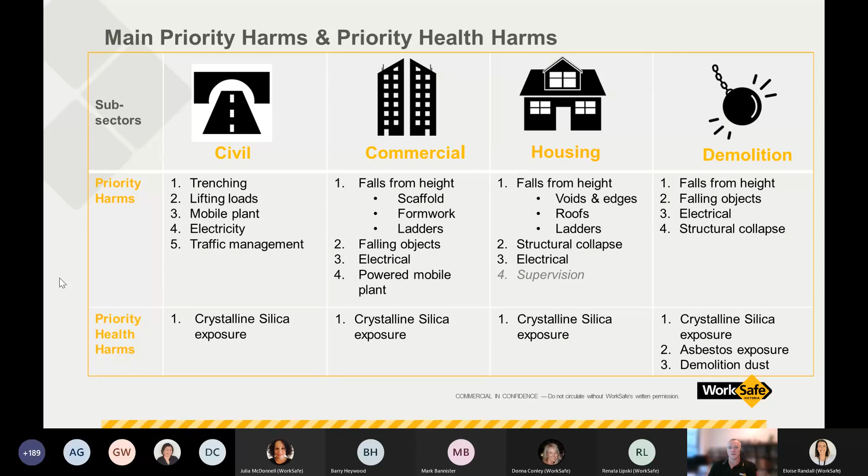I do a lot of work through the TAFE space, through presentations through industry with people that work in this industry as well, licensing groups, plumbers. And one of the key things we find is that a lot of people have that mindset that we don't have to control the risk of an engulfment until we get over 1.5 metres deep. But the fact is, whenever there is the possibility of engulfment, regardless of the depth of the trench, that risk needs to be controlled. And if that means benching, battering, putting trench shields in place, then that's what we need to do.

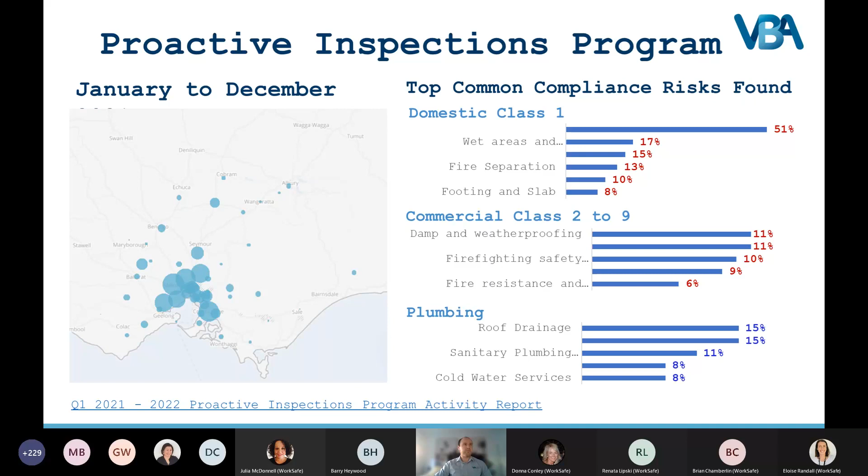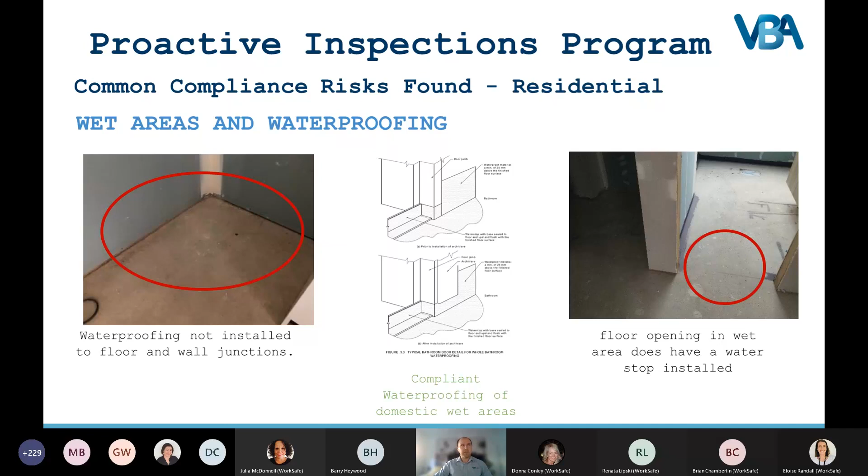Here we have compliance risks found in fire separation. We find fire separating walls not constructed as per the manufacturer's requirements and the tested system: shaft liner panels damaged, lack of mineral wool installed at external intersections, gaps not maintained between the frame and the shaft liner, wall clips that are nailed and not screwed, and wall clips only installed to one side of the shaft liner.

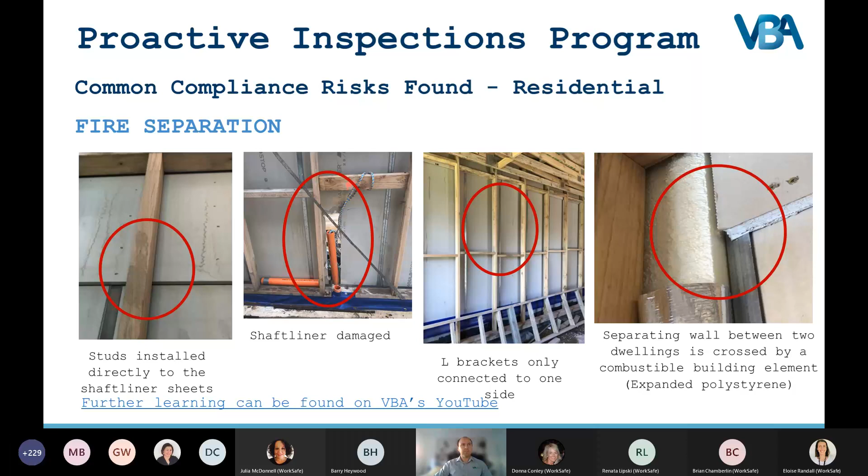We also find risks relating to timber framing. The common ones are penetrations through top plates greater than 25 mil, shear blocks missing to non-load bearing brace walls, and bottom plates overhanging the slab greater than 10 mil.

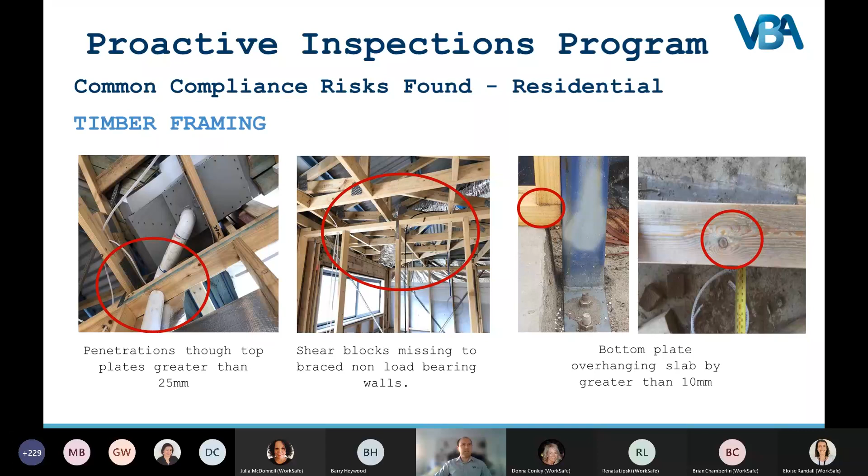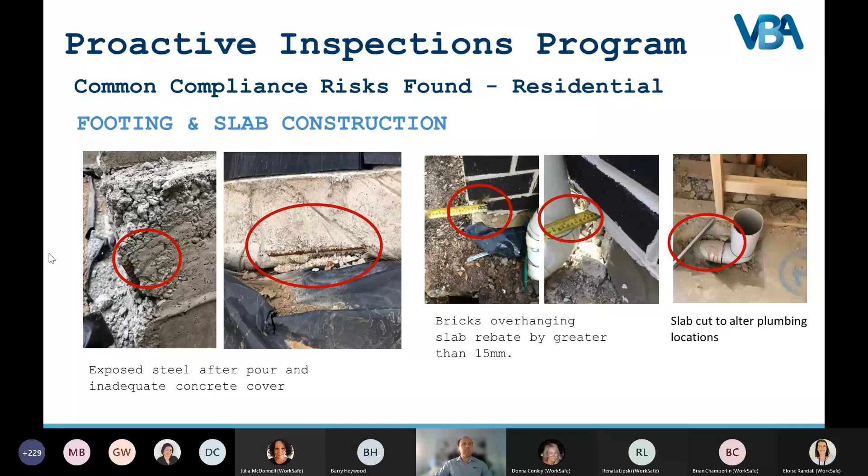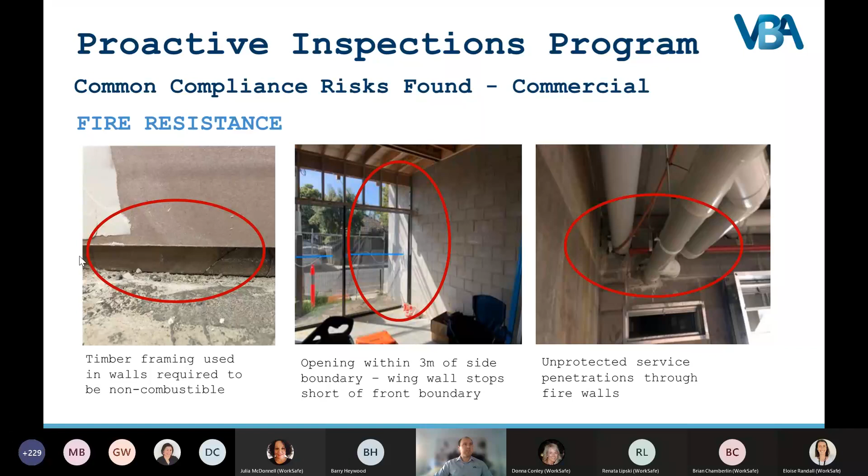Please, Donna. Yeah, with regards to access for people with a disability, some of the more common risks we find relate to non-compliant circulation space at doorways, and your minimum 30% luminance contrast between toilet seat and pan as per 1428.

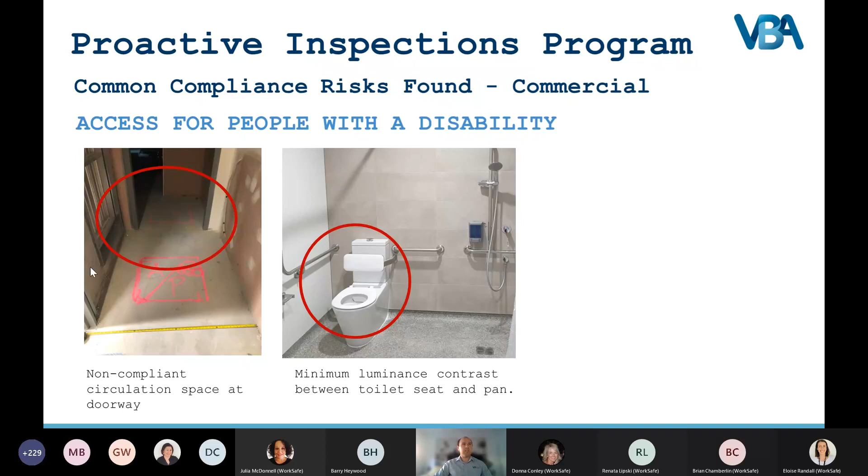Finishing off with damp and weatherproofing, some of the risks we find: bathroom floors not graded to the floor waste, no floor waste provided in urinal areas, and balcony finished floor levels being higher than the apartment finished floor level.

So your photo to the left there, floors to bathrooms of SOUs don't have the fall to the floor waste as per F1.11 of the NCC 2019 Volume 1. The next photo shows no floor waste provided to a wall-hung urinal as per Part F1.7 of the NCC 2019 Volume 1.

And your last set of 2 photos there showing the balcony finished floor level constructed higher than the apartment finished floor level, which in this case, the approved plans required the apartment finished floor level to be 100 mil higher than the balcony finished floor level, but on site was 30 mil the other way around.

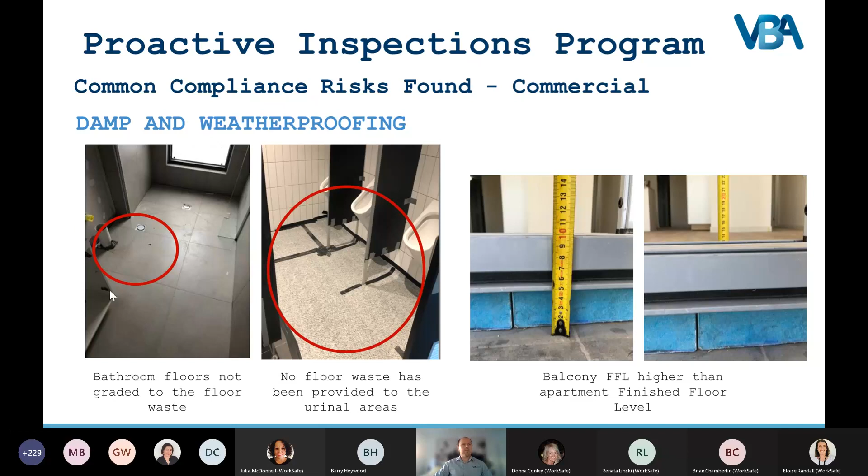I'll be speaking this morning on behalf of Proactive Inspections for Plumbing, and wanted to give you 5 examples of some of the issues our inspectors are finding, and how we think that they could be addressed through industry, particularly with roofing. The top 5 issues being rain head overflow provisions, downpipe spreaders, change of direction in box gutters, box gutter supports, and discharge of valley gutters.

Non-compliance to plumbing standards in all classes of plumbing is an ongoing issue for our trade. And whilst we're seeing significant improvements to achieving compliance and reducing risk for property owners and occupiers, particularly in the sanitary plumbing, unfortunately the same can't be said for roofing. Roofing has been identified as having the highest proportion of non-compliance in comparison to all other classes.

And proactive inspections and plumbing compliance audits through 2020 and 2021 identified design, installation and interpretation of standards for roofing compliance all contribute to the problem. This means that for us, designers, building and plumbing practitioners need to work collaboratively to fix the problem and achieve results that satisfy all parties involved in the construction process.

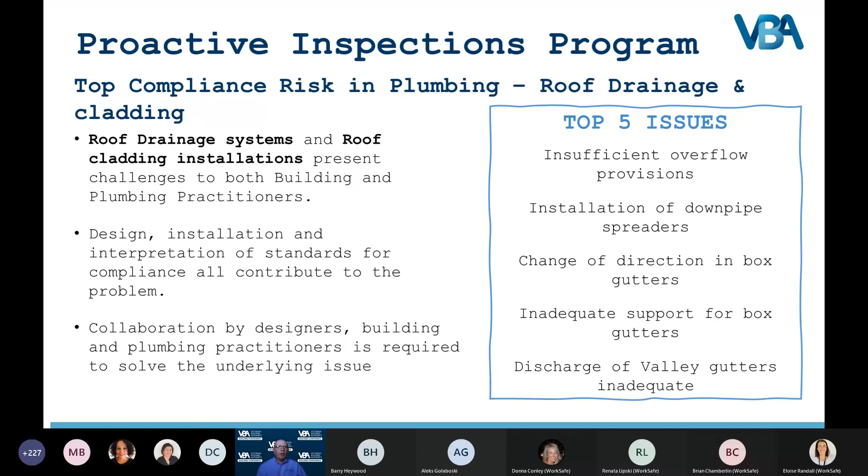So the example here being insufficient overflow provisions to rain heads. Yes, the examples here both have overflow provision provided. It can be asked though, are they appropriately sized to the connected downpipe? The overflow provision being to protect the building from water ingress should the downpipe become blocked.

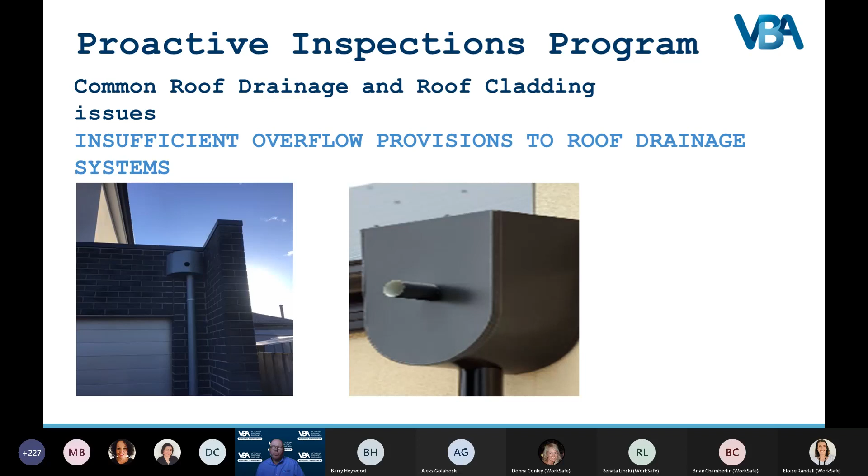Downpipe spreaders not installed in an approved manner. So we have two examples here where on the left we have a downpipe spreader that's discharging into a box gutter. It isn't directly to the sump or rain head, and it can be said that it could be impeding the water flow within that box gutter. The other example is a downpipe spreader which is discharging onto a flashing, again, which could result in water ingress into a building.

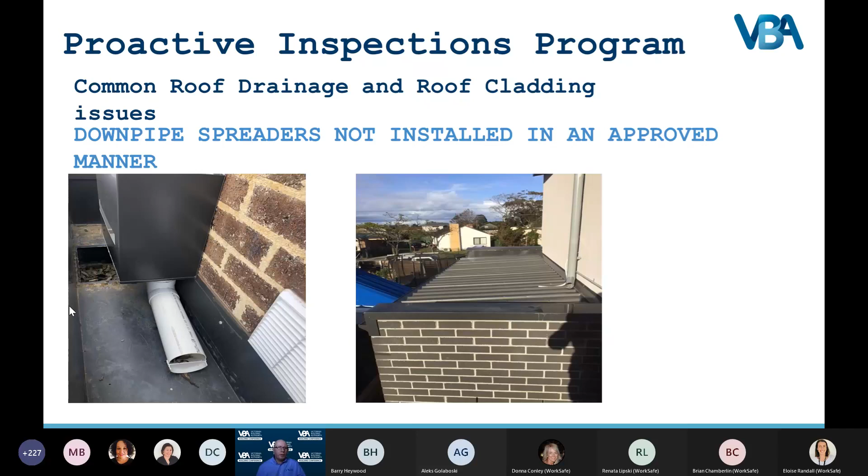Next slide, please. Change of direction in box gutters. In all instances, box gutters need to be straight and without change of direction to discharge. All box gutters must discharge through a sump or rain head and at the downstream discharge point without change of direction, i.e. not to the side.

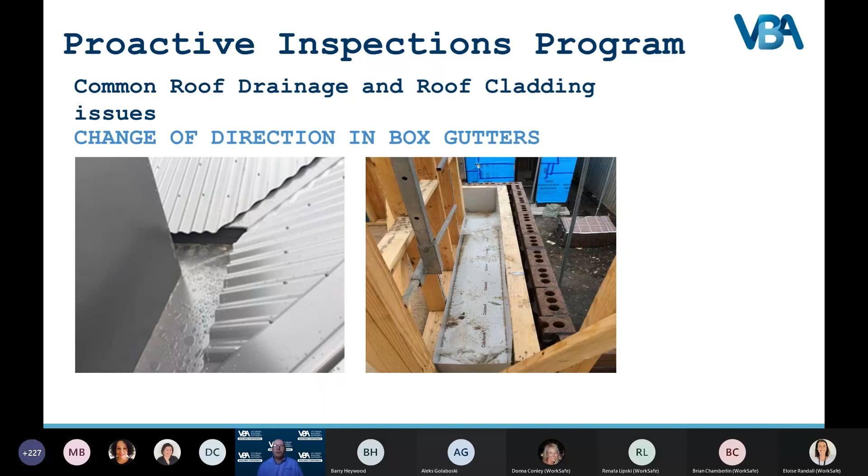Next slide, please. Box gutter supports. Box gutter support systems need to be designed and manufactured to support the weight of the gutter, and in particular if it is full of water or if it's to provide support for a trafficable load, so if people are to walk within it. Supports are to be compatible materials to the gutter.

That means that what we are seeing, and you can see an example on the right, some products including treated pine and particle board contain chemicals that can be corrosive to the metal box gutter if in direct contact. These materials shouldn't be used, but if they are, a non-abrasive, impervious, non-conducting material must be used between the two surfaces to prevent that corrosion.

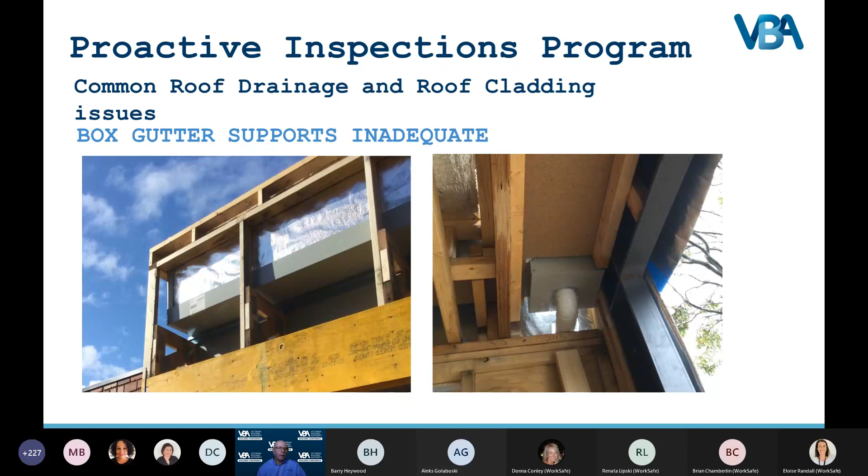And lastly, thank you, Donna, for the last slide. Valley gutters are not discharging into eaves or box gutters. As you can see in these two examples, we've got valley gutters which are discharging into a wall. They are then discharging via a flashing to the eave or box gutters. All valley gutters must discharge directly to a box gutter.

These are 5 real examples of non-conformances that we are encountering weekly. And whilst it is the responsibility of the licensed plumbing practitioner who is certifying the installations to ensure that it's compliant to all relevant standards, what we would ask is, can building designers, building practitioners work with plumbing practitioners to ensure compliance can be achieved at the planning stage? And this will hopefully avoid any potential risk for building owners and occupiers now and into the future.

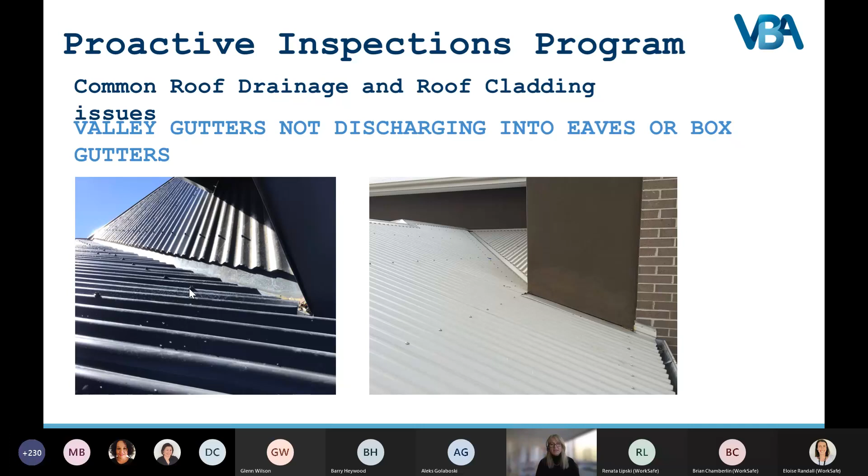Now to our final presentation. Mark Bennister, Manager of Waste and Land Policy and Regulation, will present an overview of the Environment Protection Authority, EPA, to understand about your lawful place and waste duties. I'll hand over to you, Mark.

Thanks, Donna, and thanks for having me this morning to talk about environment protection laws and new laws, particularly around waste. So for those of you who aren't familiar with the EPA, we're Victoria's environmental regulator, and we work to prevent the harmful effects of pollution and waste on human health and the environment. So part of our role is working with community, business and industry, people such as yourselves, to understand the obligations under the laws. Today I just wanted to provide some guidance, particularly around the management of waste. It is a big part of what EPA regulates.

But just firstly, I wanted to give you a brief overview of the new laws that were introduced on the 1st of July last year. So we're 9 months in now, so they're still relatively new, which have provided us the enhanced powers to prevent risks to human health and the environment. So similar to the OH&S approach, we now have the General Environmental Duty, also known as the GED. It's the centrepiece of the new environmental legislation, and it applies to all Victorians.

So if you're conducting an activity that poses a risk to human health and the environment, you need to understand how to manage those risks and reduce any harms that could arise from your activities. So the expectation is that you'll manage your activities to avoid that risk, rather than EPA coming along after pollution has occurred, which has been a feature of the older frameworks.

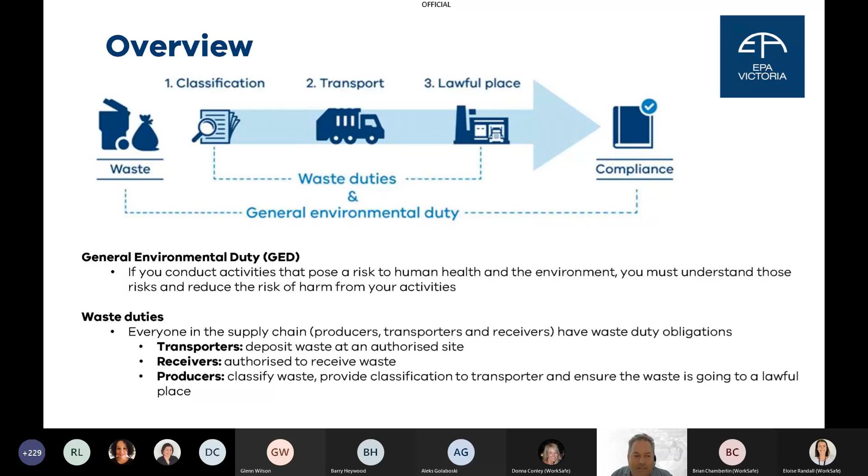So let's say you're on a site, you've done a job, you've generated a lot of waste. You need to manage that waste in order to complete the job. So how are you going to go about that? Firstly, you need to identify and classify the waste. Now, there's plenty of information on our website, but also in the back of the regulations, if you do open it up, there is a large table of all the different types of waste and their relevant classification. That classification tells you whether you need a licence or tracking, or whether you just need to consider getting it to a permitted facility, and I'll run through that in a moment.

So you'll have several different materials, no doubt, to deal with, and you need to remember that each load needs to be handled in line with the most hazardous type of waste in the load. So let's say you do have asbestos appropriately managed and wrapped in that load, you'll need to track it and get it to the landfill. But where it's safe to do so, it's always better to plan ahead and separate materials. Not only does it aid in the ability to recycle different items, but it also ensures that you're not having to track and send all of your materials to the one type of lawful place. So in the case of asbestos, you have to get that to the landfill as soon as you can.